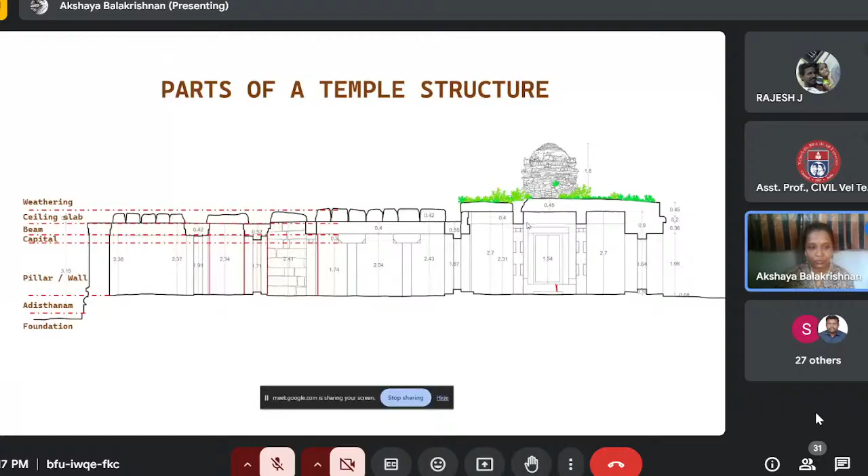So this is a stone structure. When we talk about a brick structure, the same thing repeats, but the wall is made of brick. When we talk about the roof, this is how a roof looks when the weathering is removed. The ceiling slabs are placed over the beams. So how a temple reacts is...

It works on the load transformation basis. When you have the ceiling slab, the weight of the ceiling slab is borne by the beam structure. The weight of the beam and the ceiling slab is borne by the wall or the capital and the pillar, and then the weight again transforms to the plinth portion and then the foundation. So this is how a roof looks when the weathering is removed.

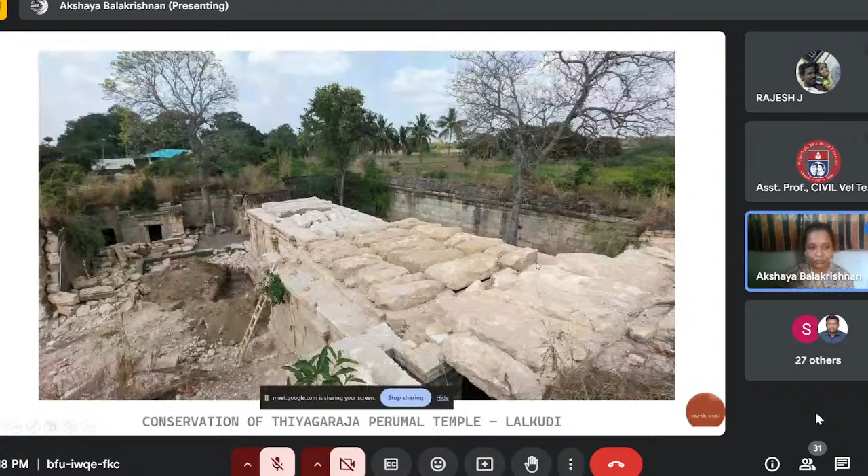And then comes the stone walls. Typically people think the entire wall is made of a single stone, but that is not what it is. What we have is an outer veneer wall, and then a core in between, and then the inner veneer wall. So what we usually see is just the outer and inner veneer stone walls. The inside core wall is not usually visible. The core wall is usually made of debris.

So either the lime and brick bats are used in a core wall, or the stone waste that we get during chiseling or sculpting is mixed with lime mortar, and it is poured in between the two veneer walls.

In conservation, we usually say the stone walls are like the bones of a human body. When a bone gets fractured, it can be easily fixed. Whereas the core wall is called core wall because it holds the entire structure together. When the core wall is deteriorated or affected by vegetation or human error, you'll have to remove and reset the entire temple. But if the core wall is tight, it gives strength. If only the outer and inner veneer stone walls are damaged, you can easily repair or restore a temple structure. So this is the inner veneer wall and the core wall in between.

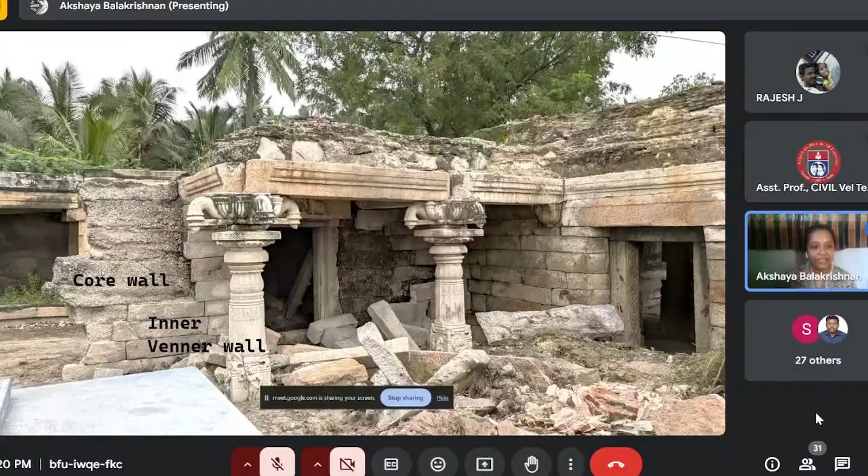You can even see the case example here. Here the core is affected, whereas in this case, if you see, the core is very good, so it can be conserved very easily. Whereas here the core is deteriorated due to moisture and vegetation growth, so here the entire temple has to be removed and reset.

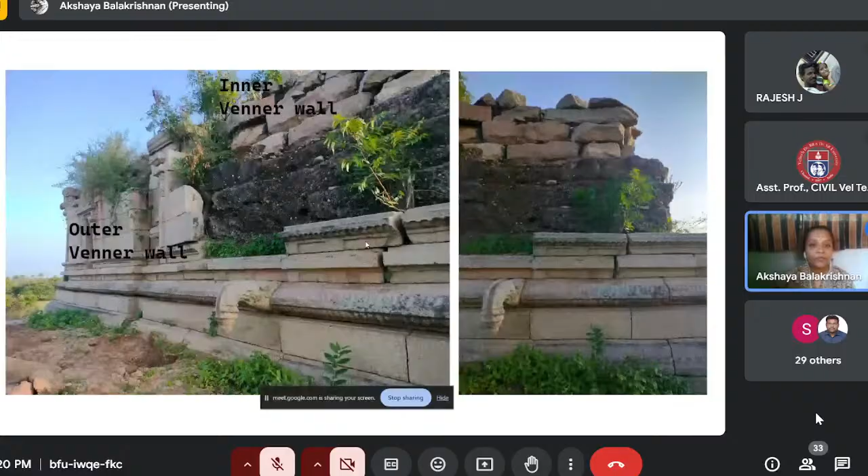So in terms of section, you can see any vegetation that grows only from the core wall, because it has all the moisture and the feed for vegetation to grow.

I would also like to ask, is everyone comfortable in English, or can we talk in Tamil? Whichever language you prefer, we can continue in that. English is fine, or can we talk in Tamil? I think English will be better, ma'am.

Okay, so when any vegetation grows, it grows from the core wall because that is where the feed for vegetation comes from. When the stones are assembled, there is no mortar in between the stone blocks, it just works on the interlocking principle. So what they do is keep two layers of stones, pour in between the core wall, and then keep stacking the stones higher and higher. This is how the walls of a temple look.

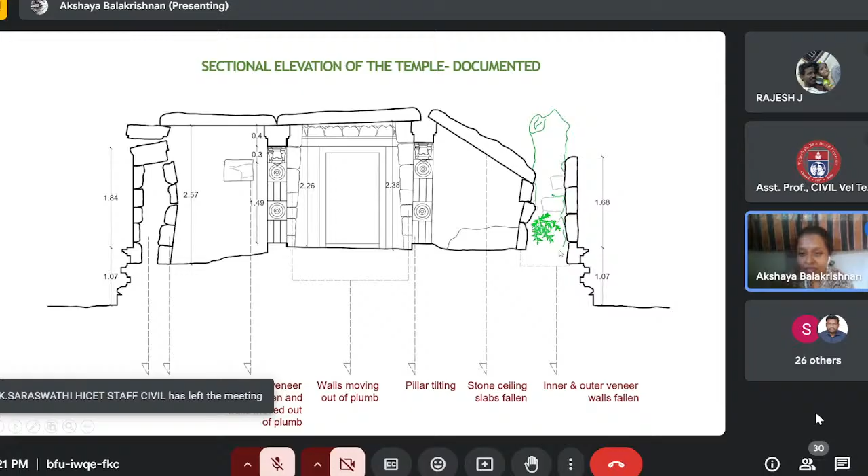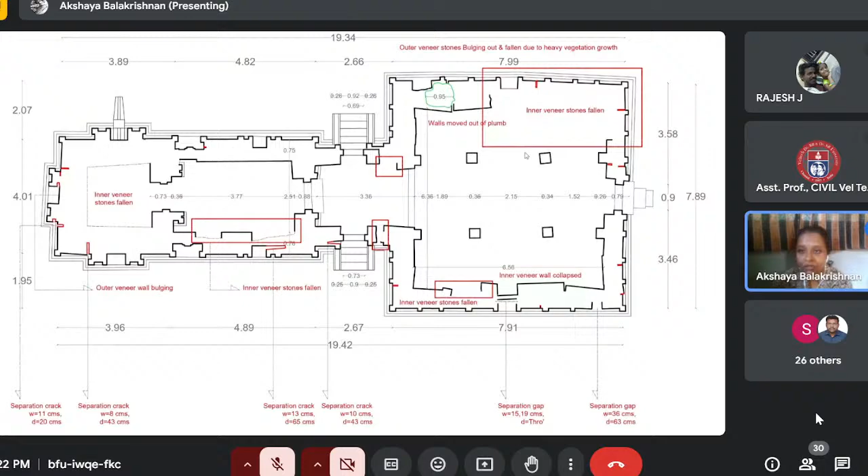So here an entire tree has grown from the core wall, so this has to be entirely removed and reset. Here's another example. From the plan view, you can see two layers of stones, and in between you have the inner core wall made of lime and brick, and from there a tree has grown. It usually pushes the inner or outer veneer stone walls, and it leads to damage of the structure.

Coming to the different types of foundation we can see in temple structures, usually the misconception is that the stone foundation goes 10 feet, 6 feet, 7 feet deep, or some people say temples go 10 feet into the ground level. That is not at all the case. So when we look here, we have different types of foundation.

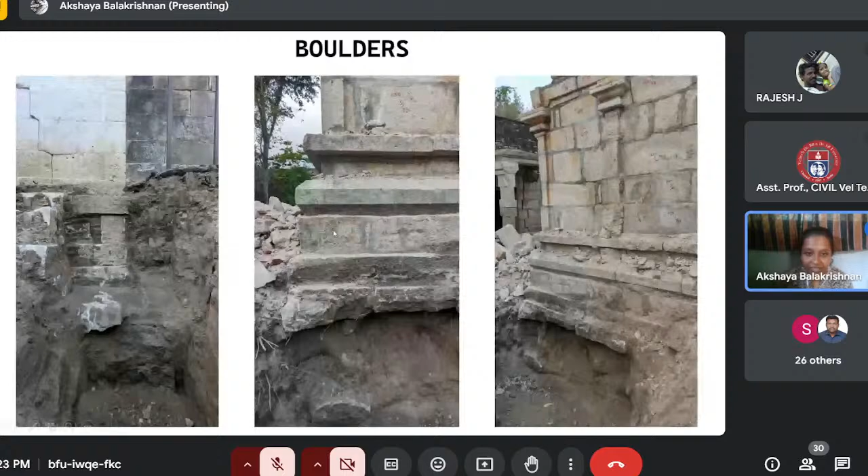One is the boulder system - stacking up all the boulders and then constructing a temple just above that. This type of foundation can be seen in the central part of Tamil Nadu, where there are rocky surfaces. This is a temple near Perambalur, where we observed boulder foundation. These are the boulders, and from there they started the Adisthanam portion, and from there the wall structure continues.

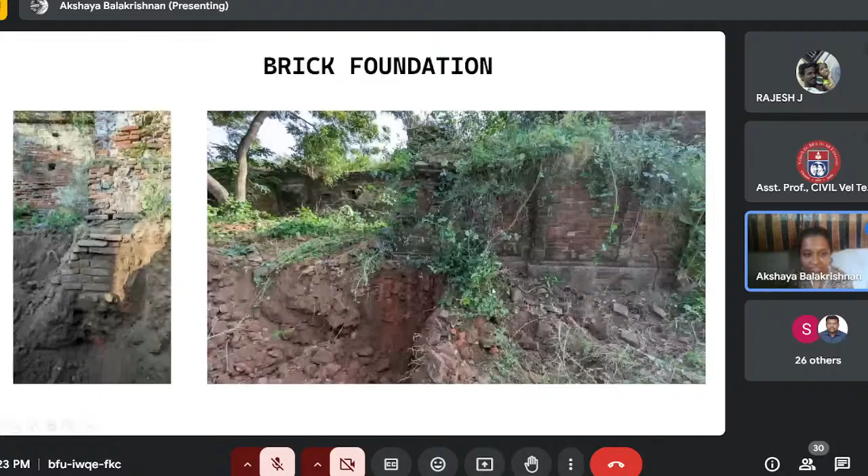Next is brick foundation - just brick structure, where the depth of the foundation goes from 3 feet to even 5 feet. It has only brick, and from there the brick masonry continues. This is the majority of foundation seen in any part of Tamil Nadu - just one layer of stone platform, around 23 to 25 centimeters. This is the very predominant and common type of foundation seen almost everywhere.

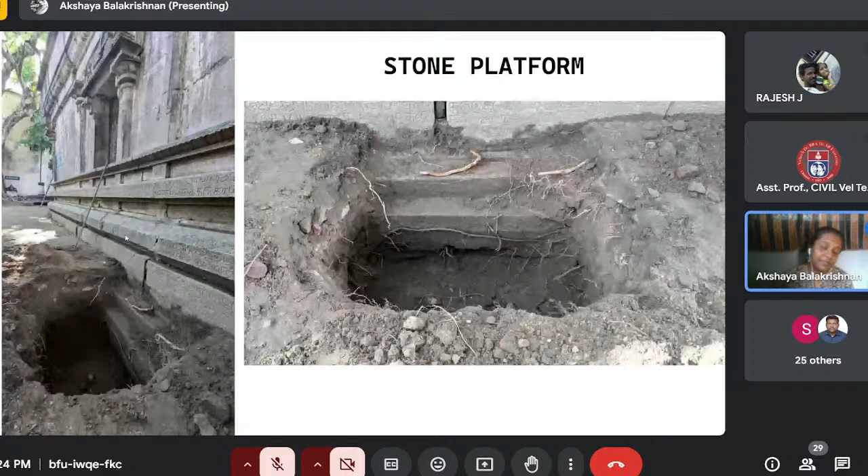Beneath this single layer of stone platform, there is sand that is highly rammed or compressed, and above that just one layer of stone platform, and from there the adisthana or plinth level starts. This is another stone platform foundation, just 10 centimeters depth. From here we can see the river sand compressed, and from there the temple structure continues.

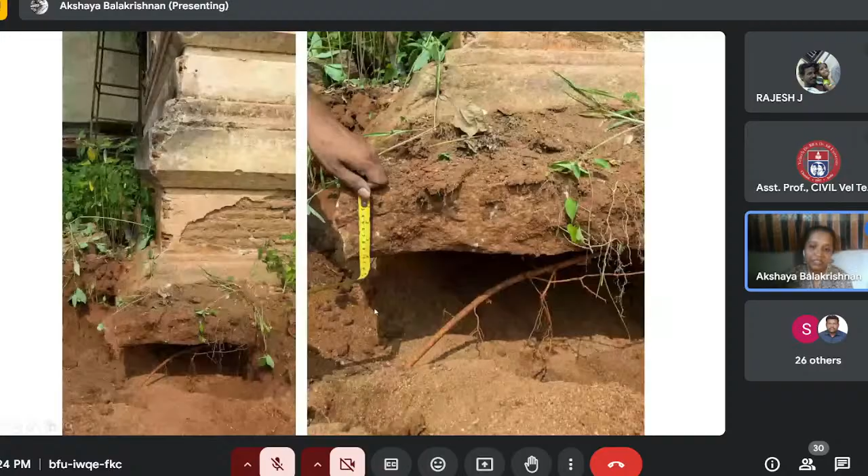This is another type of foundation called mixed foundation. Here we have three layers of a stone platform, which will be around 60 to 65 centimeters, and from there brick masonry continues beneath. This type of foundation is usually seen in delta regions or any regions adjacent to a river body, like where a river flows beneath, or it will be agricultural land. In such places we have this type of mixed foundation.

So these are the different types of foundations that are easily seen in any temple. It is not that the deeper the foundation goes, the stronger the temple structure is. No, the thing is how the soil is and how the load gets distributed, because we don't have point to point load distribution. The load gets distributed everywhere, and how well the soil is rammed, these things matter in terms of temple construction. Does anyone have any doubt up to this point, or can we continue?

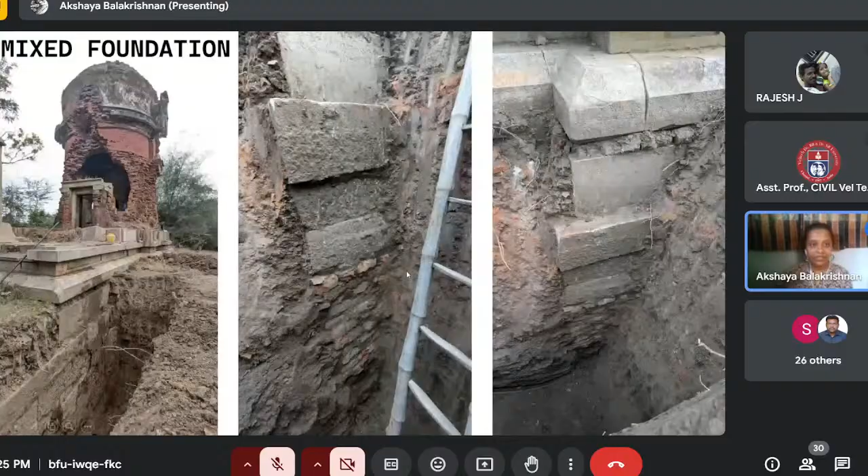We can continue, ma'am. Yeah, okay, ma'am.

So we have seen the major parts of the temple and how they are made, and now coming to the different damages in a temple structure. When it comes to damages, they can be majorly classified into two types. One is vegetation, which is the main cause that leads to damages of any temple structure, and the next is stone deterioration or human error - people destructing the temples. They would have added different materials over the temple, leading to improper load distribution, which again leads to structural imbalance. So those are the different categories, but the major type is vegetation growth.

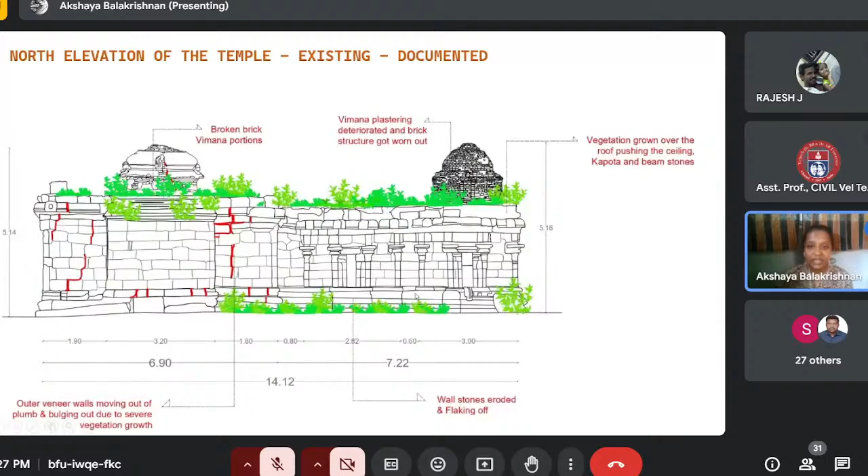So this is how we document a temple structure and assess its condition - what are the different damages observed and how to treat them. Here, the major reason for the deterioration of this structure is due to vegetation. What can be done is you remove both the inner and outer veneer walls, repair the core or redo the core freshly, and then refit them.

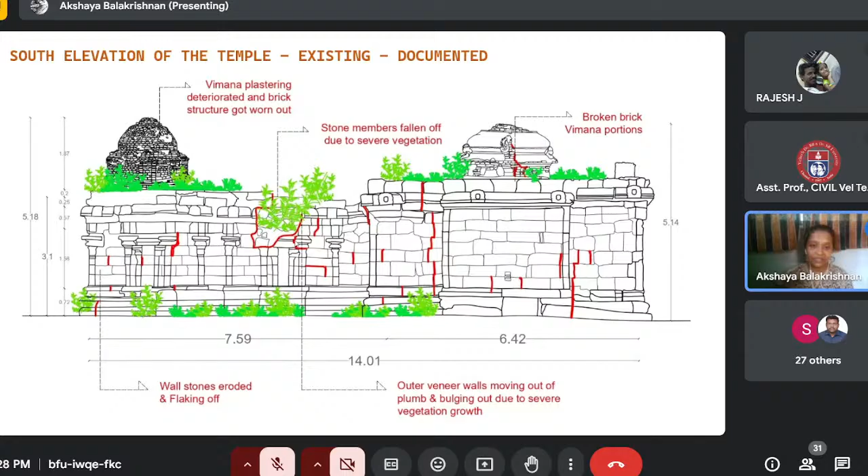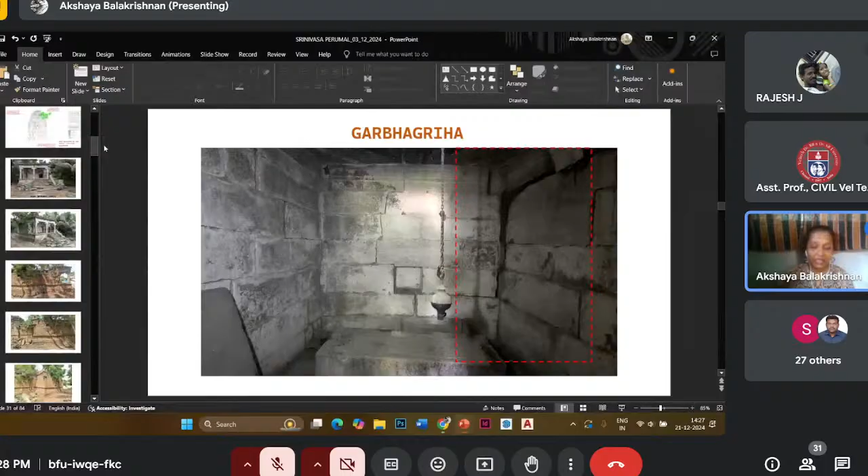Coming to another temple structure, the example I'll show you here is another case of vegetation. The previous one I showed had minimal impact due to vegetation, whereas here it has a massive impact due to vegetation. For example, you can see one part of the mandapa has already fallen here.

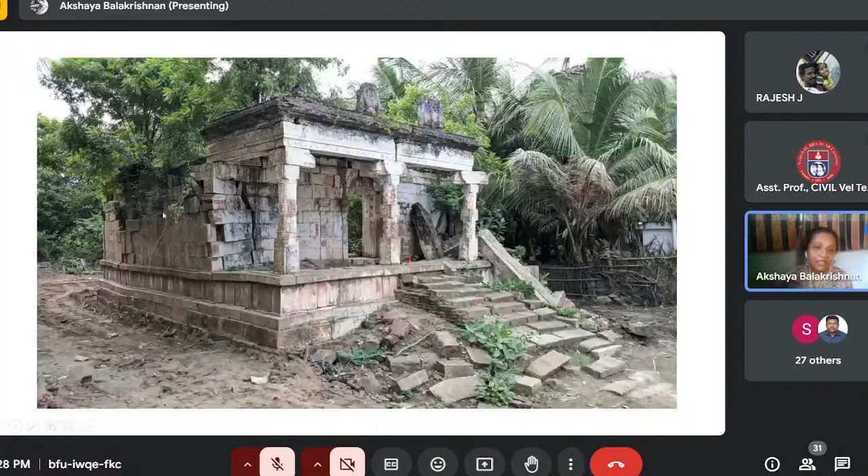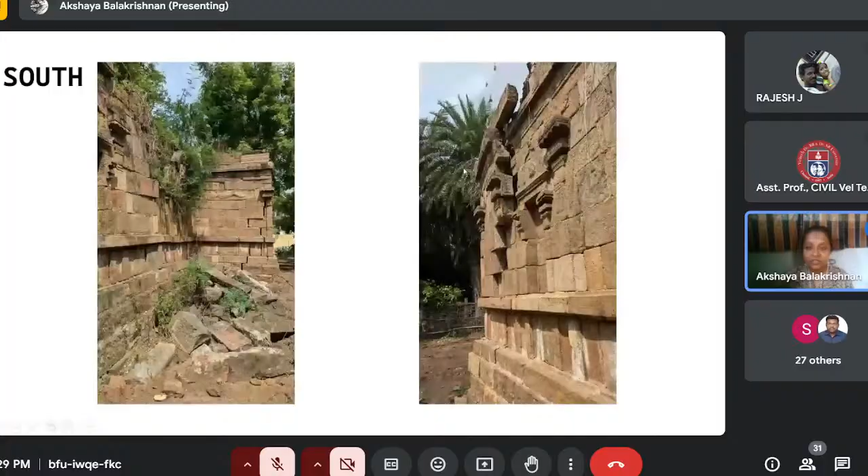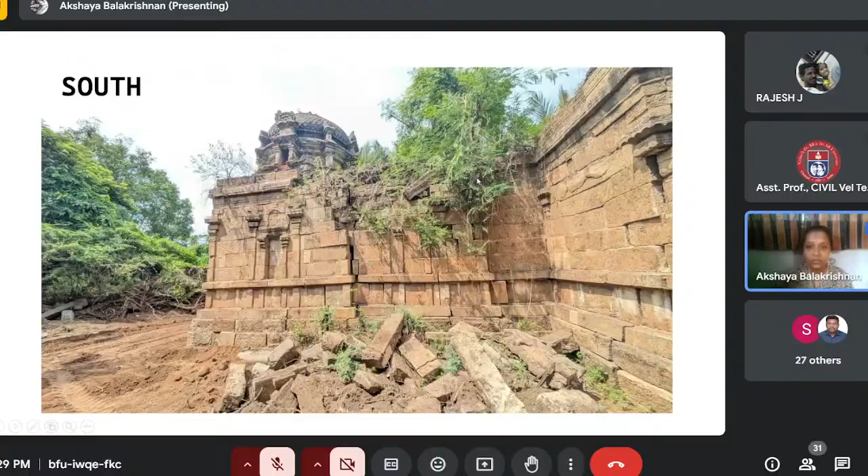This is how the stone structures go out of plumb - we call them out of plumb. The stone veneer walls move because a massive tree has grown in between here. This leads the stone walls to come out, get tilted, or even fall off. You can see the stone members that have fallen off due to the vegetation growth, and you can see here how it has gone out of plumb.

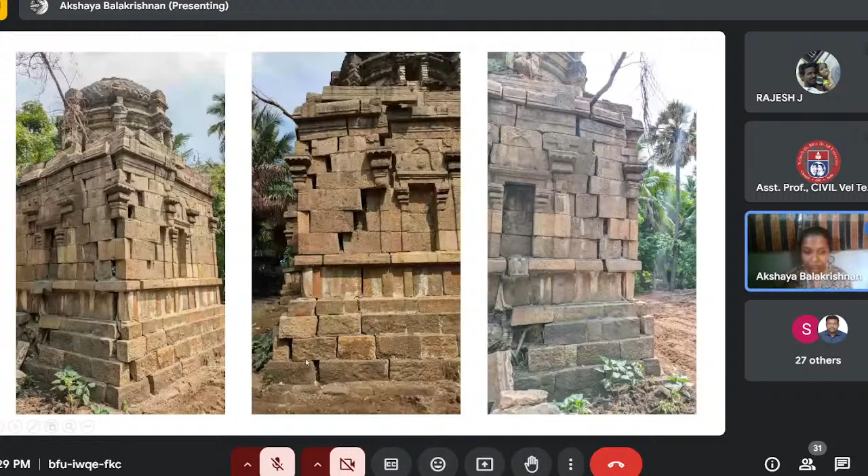So how can you repair this? We cannot repair such structures. What can be done is you have to remove and refit - reconstruction is the only possibility here. We cannot preserve or even conserve the structure because the tree root has gone up to the foundation level. You can see here the tree has gone up to the foundation level.

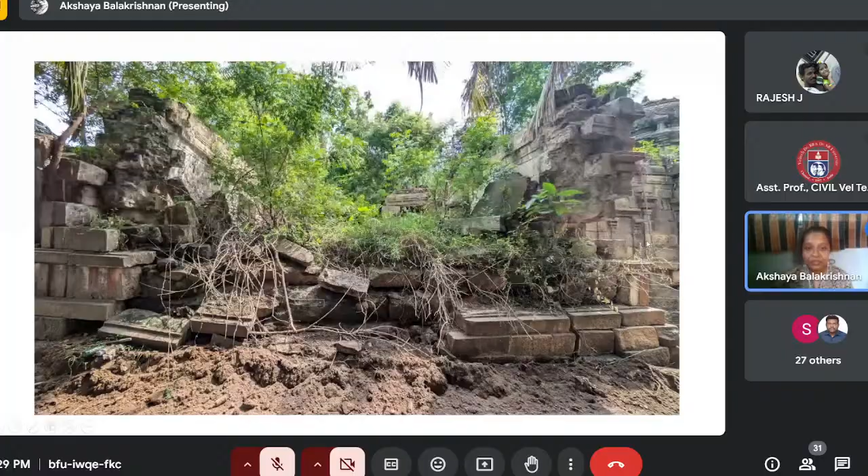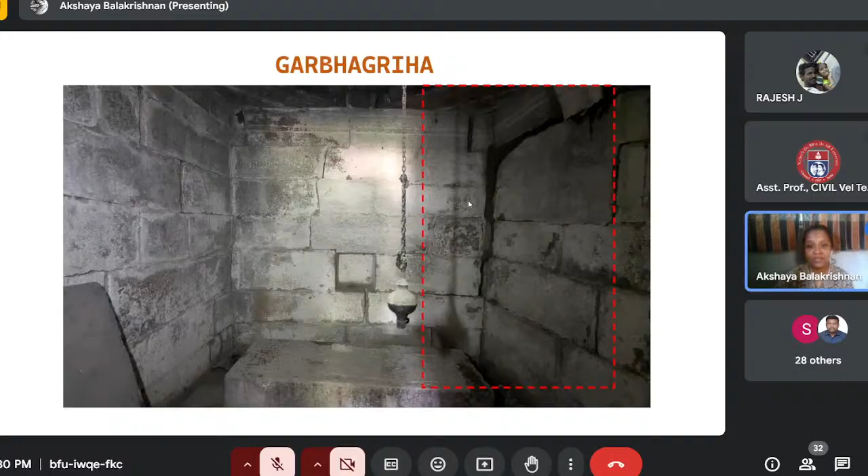So one entire part of the mandapa has collapsed. Usually when a temple structure gets affected, either the inner veneer walls get affected or the outer veneer walls get affected. In such cases, we can only remove the affected portion. If the outer veneer wall is affected due to vegetation, you can easily remove, redo the core and fit the outer veneer stone portions. Whereas in this case, both the inner and outer veneer walls have been affected - you can see how the foundation has collapsed, how the stone floorings have lifted up due to tree growth inside. You can see the tree grown inside the garbhagriha, or the karuvarai as we call it.

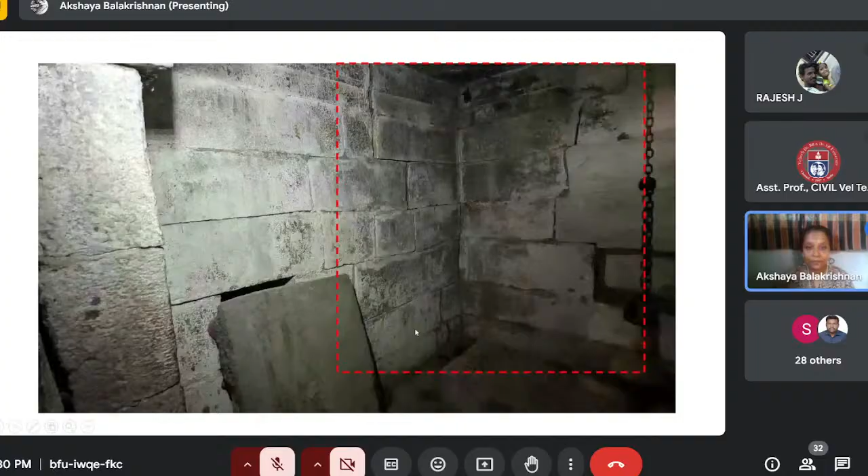So how the stone floorings have undulated, and how the inner veneer walls have also been affected majorly due to vegetation growth.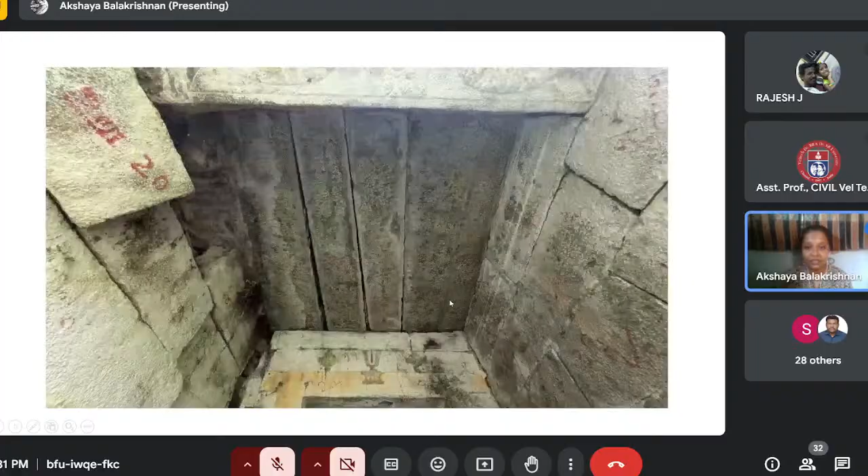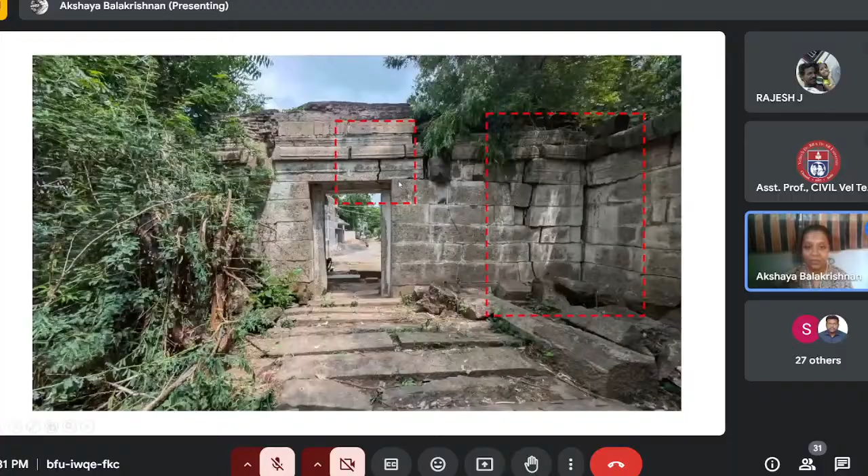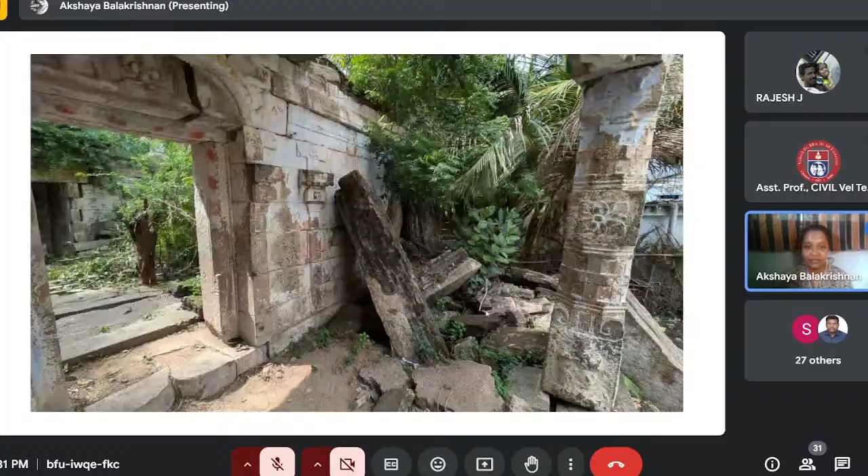So this is the portion that we saw from the outer side, how the mandapa walls have collapsed, how the beam members have been broken, and how the wall structures have gone out of plumb. The entire mandapa, including the pillars, beams, and capitals, all have fallen off due to severe vegetation growth. So this is one major cause that will lead to the deterioration of a structure.

So the next case is stone deterioration. For example, you can see here how the stones have eroded over a period of time. This will easily be a 500 year old temple structure, not more than that. But look at the amount of deterioration. So we won't be able to even reuse these stones when we conserve the temple.

The only thing we can do is, if you can see, the brick vimana over the stone structure is in a very good condition, but the stones that are holding the vimana are not in a good condition. The stones have eroded. So what we are approaching in this case is we are planning to cut the vimana, lift it, redo the stone structure, and refit the vimana. This is the first time we are trying to experiment with this because the brick structure is in a very good condition and we don't want to remove everything completely. Once we are able to do this, we can take this prototype to different temple structures where the brick structure is good but the stone is not in good condition. We'll be able to incorporate this idea wherever we can.

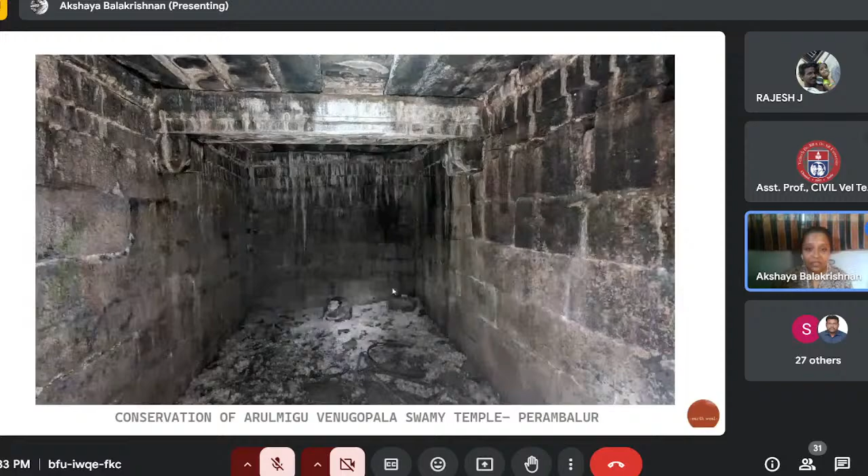So here you can see an example of soot deposit, or how bats or other living beings cause damage due to unusage of the temple structure. What are all the damages that can be caused? This is surely caused due to moisture and bats.

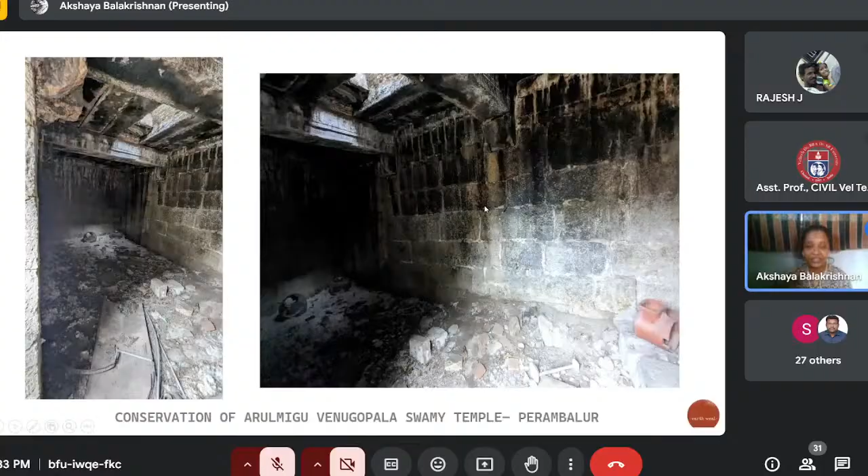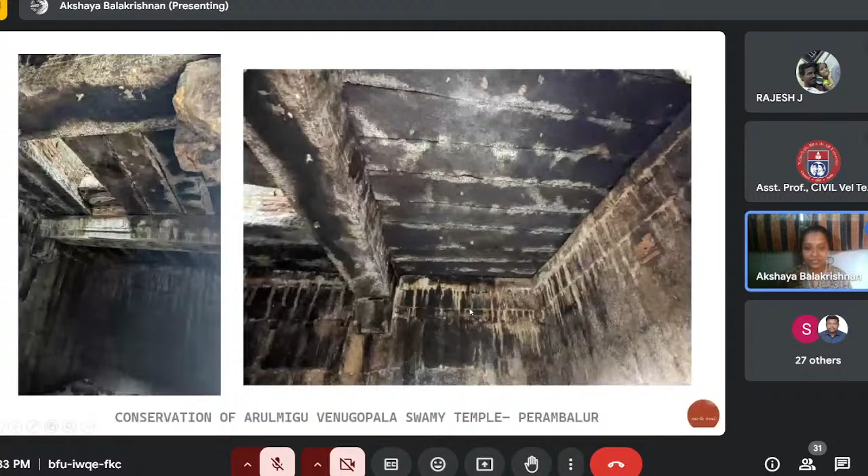But when you see the vimana, it is in a very good condition. This type of stone is made of fossils, so you can see different types of shells coming from the stones, right here. These are sedimentary rocks or fossils that are being used for temple construction, and they erode over a period of time.

So this is another case study that I wanted to show you for stone deterioration. So how can we conserve all these temple structures?

Methods of conservation: the first step is documentation and condition assessment. So how do we document a temple structure?

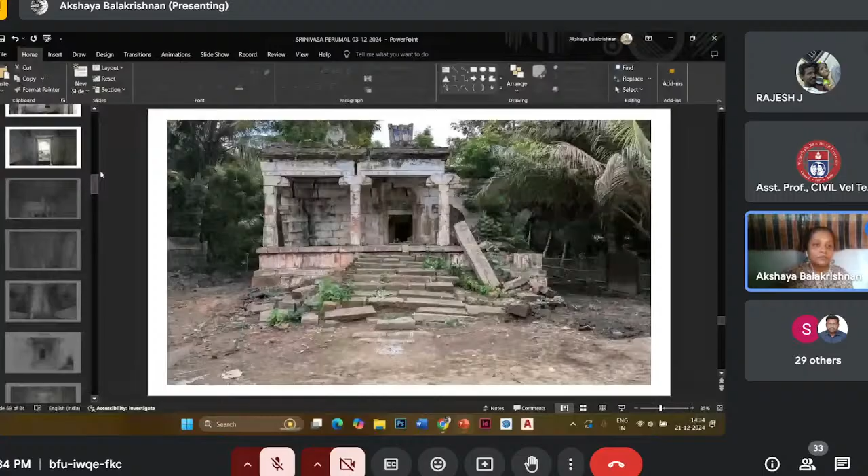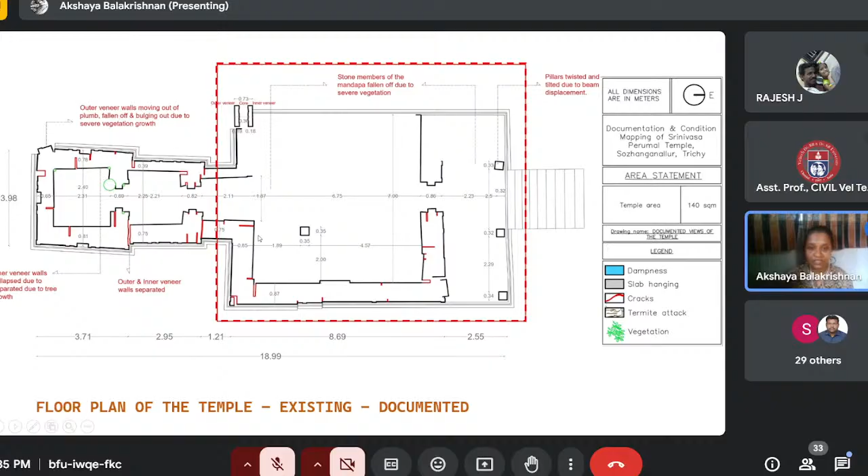First, we prepare a plan layout where we'll show how many stones are dilapidated. This will be a detailed level of document, a preliminary level of documentation where we assess the conditions - what are all the major damages that have occurred and why, and how to treat them. This includes the cracks formed due to vegetation growth, the separations that have occurred, and the fallen portions. We'll be recording everything.

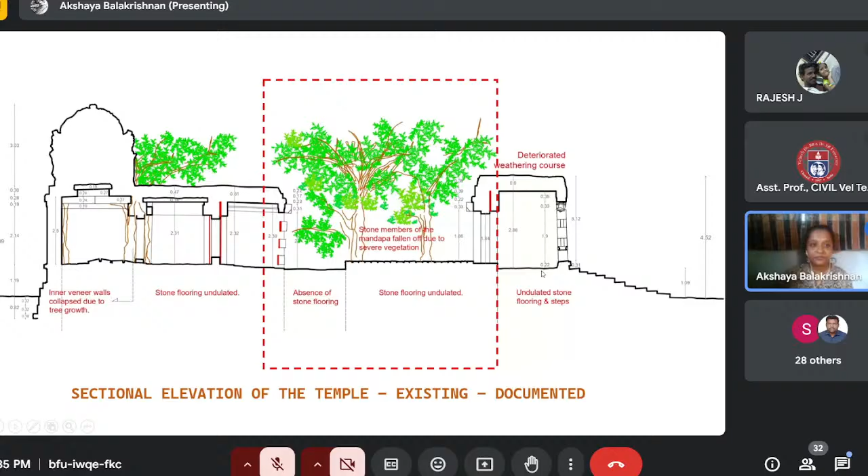So this is done at a plan level, and then at a sectional level, showing how the stone floorings have undulated. We can also record any tilting observed in the walls, which will need to be adjusted. Any damages observed in the temple structure will be shown in the sectional drawings. These are the elevation drawings we have prepared that show different damages, the conditions, and the level of damage that has occurred.

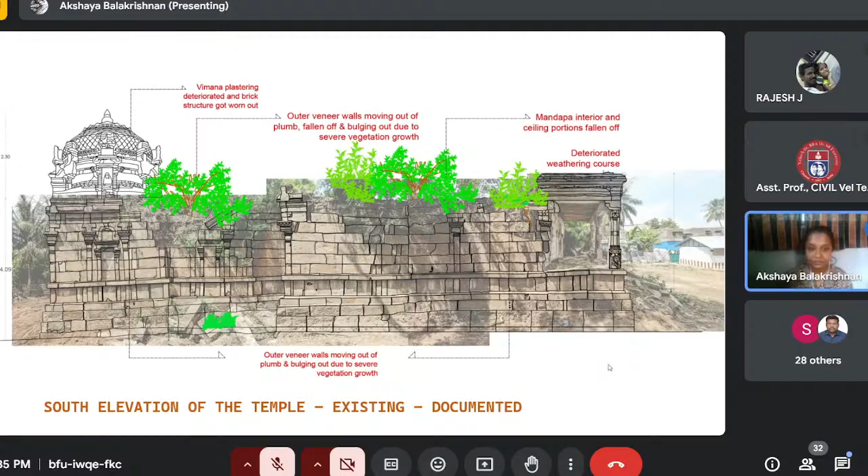So this is the first set of restoration, that is preparation of documentation drawing and assessing its condition. And when it comes to brick structure, once we assess, so till now I was talking about conservation or restoration of stone structures.

When it comes to brick structure, how can you conserve them? Stone structures are like bones, whereas brick structures are like our tissues. So once they are gone, you have to replace them. That is the similar case here.

So in a brick structure, when a tree grows, it gets lots of space and moisture from the brick and the lime water to grow. So they grow vigorously, and wherever they get a chance, they grow everywhere, and they separate the brick structure and lead them to fall.

So you can see the structure. It may look like a sound structure, it is intact, but when you just hit the brick structure, they fall off rapidly. That is the case when it comes to bricks.

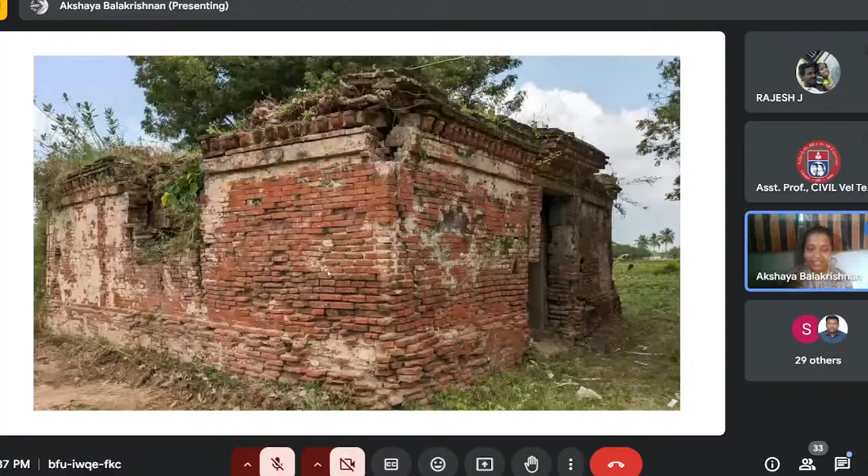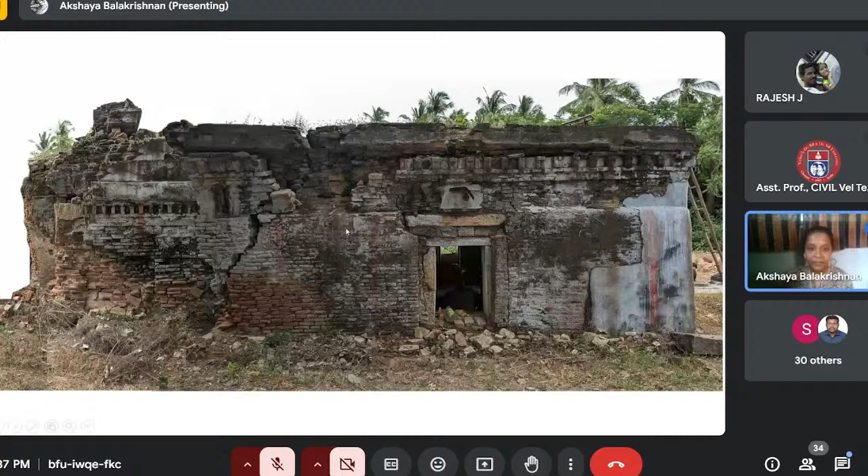This again is an example of how the bricks have separated from one another and how they are about to fall, on the verge of falling. Whereas this is a case where the core structure is sound, only the outer brick surfaces have fallen off.

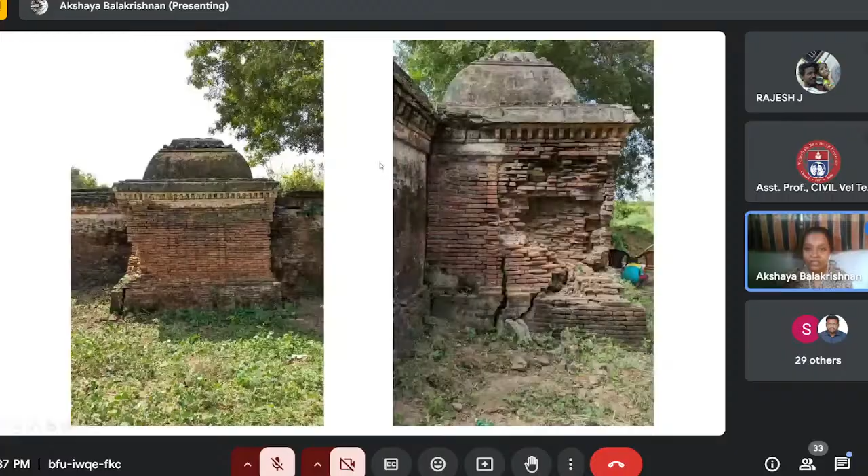How can you treat such structures? If the case is like this, you have to remove and reset. Whereas if only the erosion has happened or only the edges have fallen off, or there is a crack in between the structure, something like this,

what you can do is go for stitching or underpinning. Stitching is when you have a through crack in between like this, you'll have to take off portions from different intervals and introduce a different material. For example, you can introduce stone.

We don't usually go for cement or concrete blocks. We usually go for either a lime block or inserting a stone, because that is the appropriate material you can use for heritage structure conservation.

So you can see a continuous crack here. You'll have to remove different patches from different levels, and you can introduce a different material like a stone or a lime structure in between to stop the crack.

One thing you have to observe is whether the crack is still continuing or the crack is dead. What you can do is place a panel of glass in between the crack, and you can see if the glass panel has moved a few centimeters apart, or if the glass panel is also cracking. These are different methods to find whether the crack is live or it has stopped.

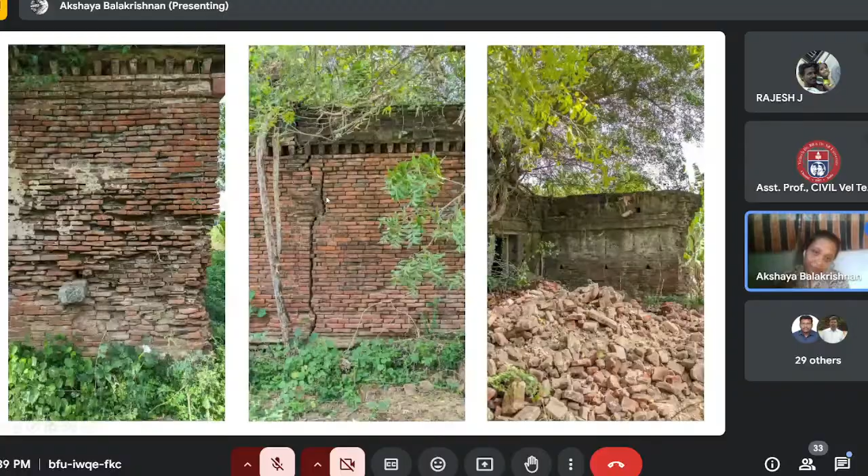Iron will lead to corrosion in a future period of time, but you can use stainless steel for stitching, or you can incorporate different methods such as introducing stone members or lime members in between the cracks.

So these are the types when it comes to brick wall conservation. And then you can grout the joints using lime plaster. We are very strict - we never go for cement plasters or concrete mortars. We don't go for that. We either go for lime mortar, lime plaster, or go for stone stitching.

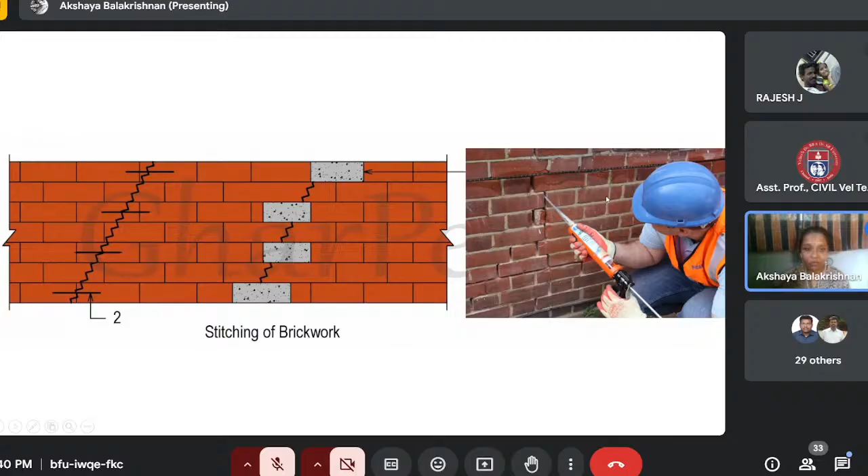So when it comes to stone structures, the first type is restoration - how the walls are restored. So this is one example.

What we have done is we removed the outer veneer wall. As I have mentioned before, the inner veneer wall is not affected due to vegetation, only the outer veneer wall is affected. So we removed the outer veneer walls, and we removed the tree trunk.

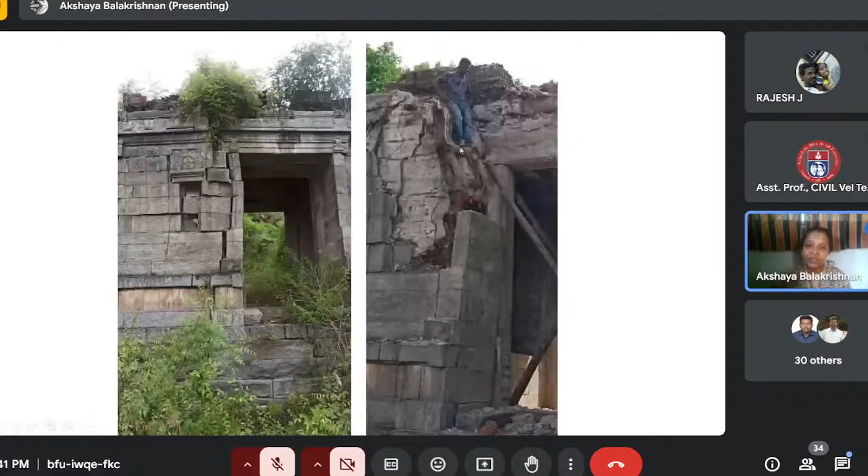Yeah, this is the tree, and we are refitting. What we are doing is strengthening the lime core by adding some boulders or doing lime plastering work, and refitting the stone members.

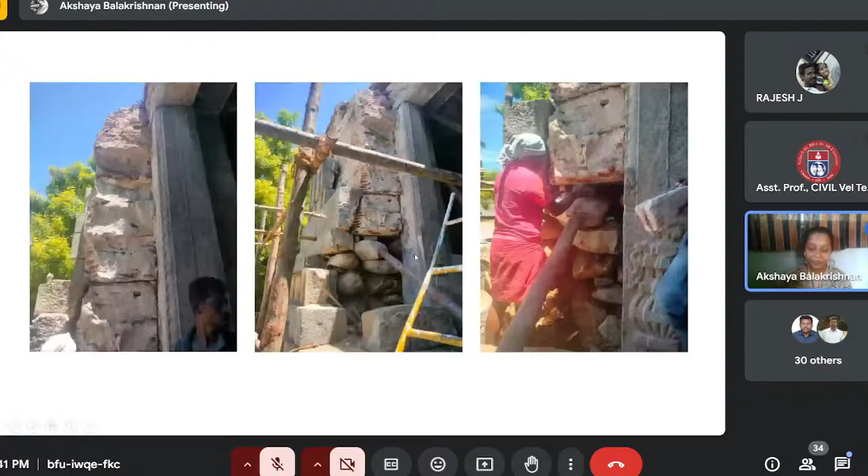So this is how the temple looks when the vegetation is removed, and then we'll have to refit all the removed stone members. So this is a part of restoration. Next is conservation - you can see how we have conserved a temple here, the before and after images.

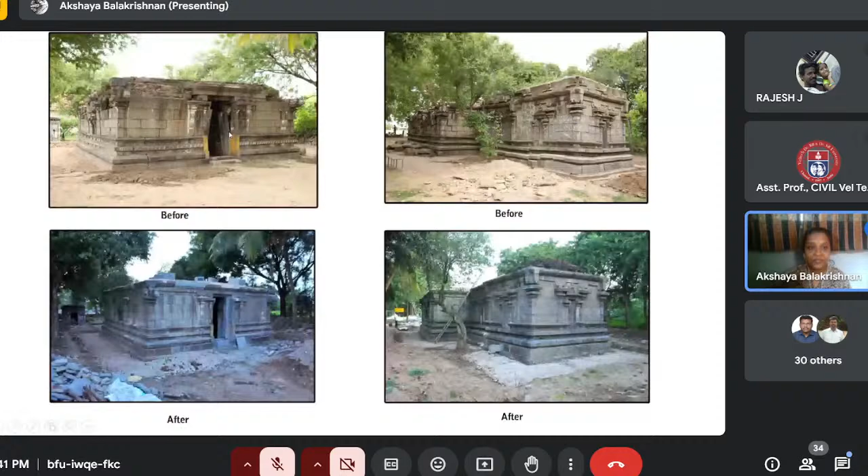Here again, the major cause is vegetation growth. Luckily the inner veneer walls are not damaged in this case, only the outer veneer stone walls are damaged. So we have removed the outer veneer wall, redone the core, and then refitted the stone walls.

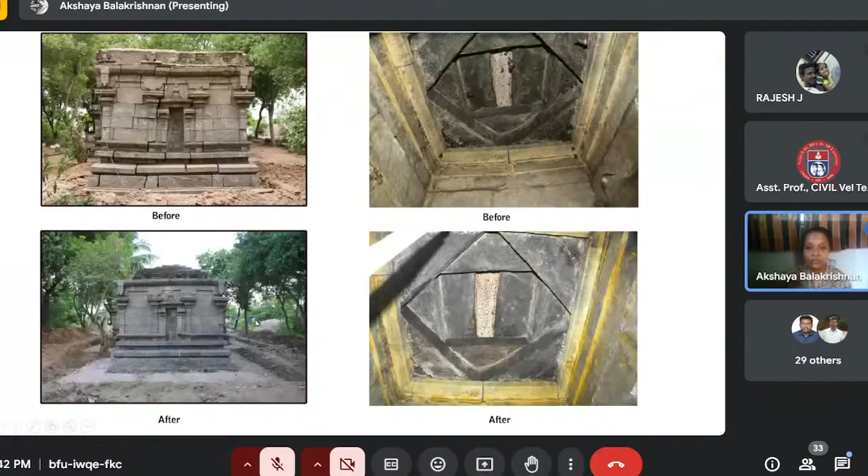You can see how the removing and refitting happens here.

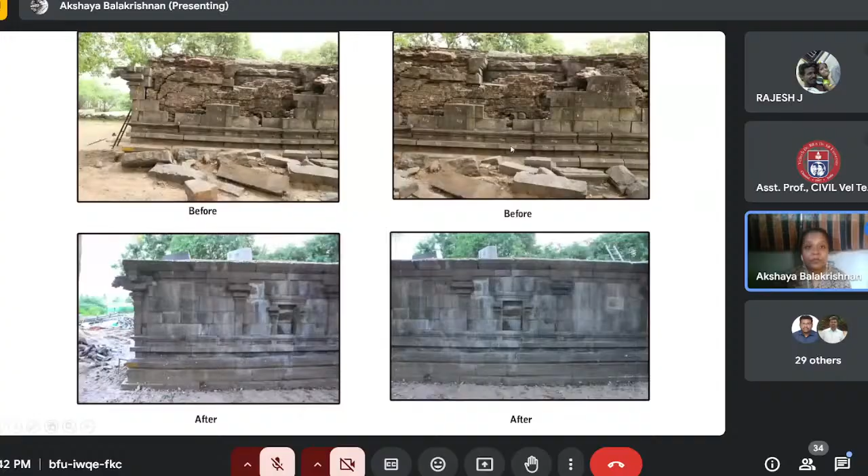Once we remove the stones, some members may have broken, or some may not be in a condition to be reused. For example, you can see this portion here, and only for those portions we'll order new stones, done with similar measurements and proportions, and then refit them.

You can see here, only that portion will look in a different color or visually different, but that is okay. We are not using entirely new stones, we are reusing the stones as much as possible, and only where the stones are not available do we go for new stones.

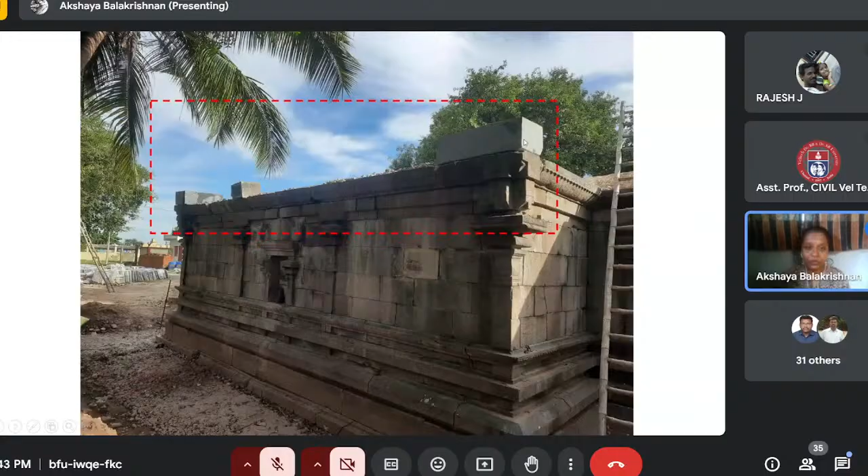For the counterweight, since the original counterweight stones were not available, we have introduced new counterweight stones. The purpose of the counterweight, as the name suggests, is to add to the weight of the entire structure. The entire temple construction concept works on load distribution, so however much weight you give over the structure, it stands still. So here we are imparting new counterweight stones to the structure, and then applying a new weathering course.

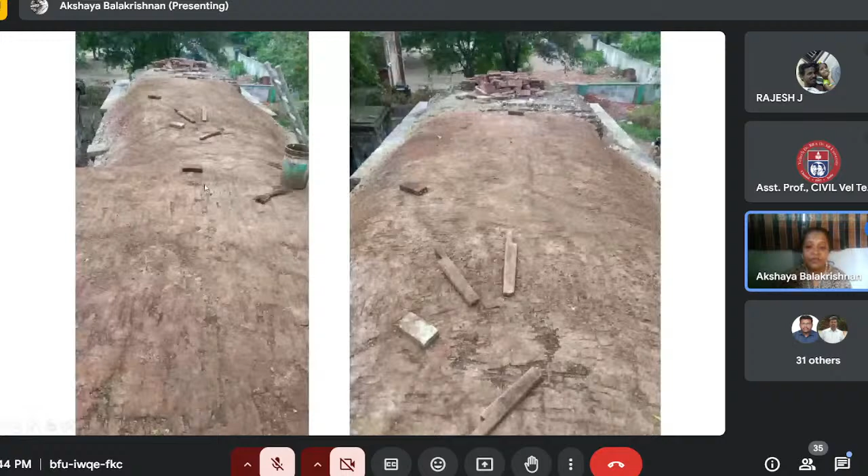Here you can see how much slope we have given. The more slope you give, the less water will stack on the terrace. If water stacks on the terrace, it leads to water seepage, damage, and dampness in the interior of the structure. So we have to give a good slope — around 1 to 1.2 feet in this case — and we do the weathering using lime concrete, over which we lay brick bats.

This is the tool that we use for ramming the brick lime concrete. Once you ram it well and the lime concrete is set, we go for brick bat for the weathering finishing.

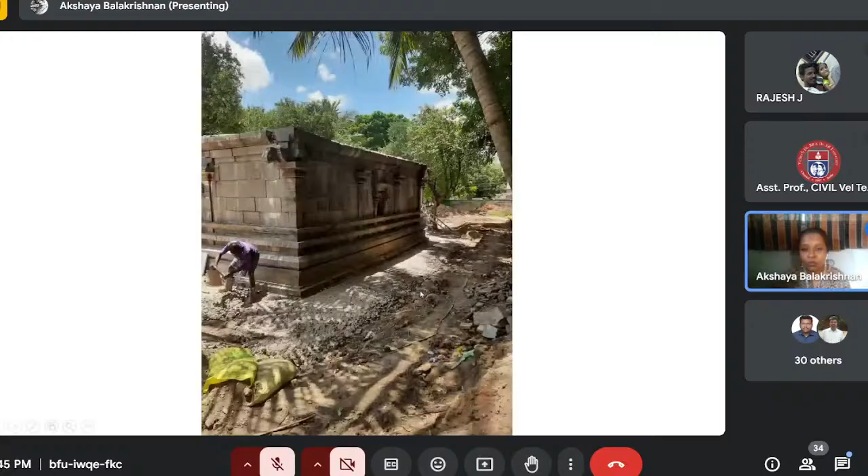The next important part is providing a stone apron. Initially they wouldn't have given any stone apron, but providing one stops water percolating into the foundation of the structure, and it also stops vegetation growth adjacent to the structure. So we take around 1 to 1.5 meters from the temple structure.

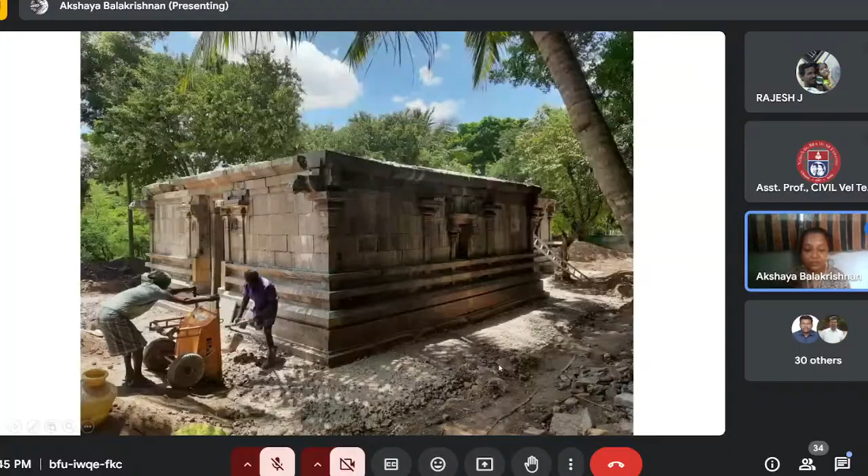We do a pitting, and then pour brick jelly concrete and ram it well. Here you can see how they are pouring the lime concrete with brick jelly, and then we place the stone flooring. This is called the stone apron — it saves the structure from water percolation and vegetation growth.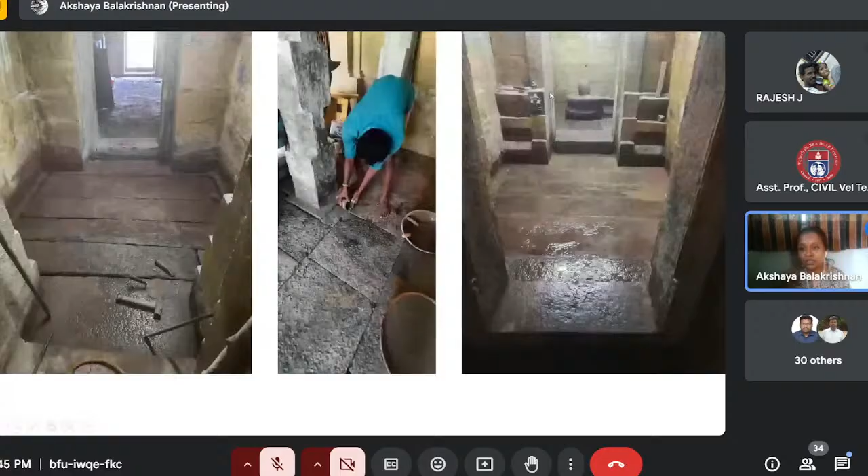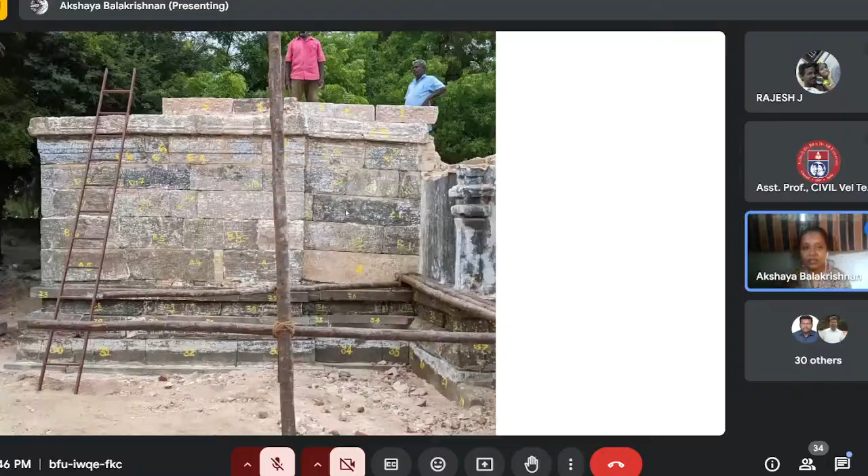So this is an example of conservation of a temple. Now we can come to the reconstruction of a temple structure, where we have removed the old weathering course. This is the first part — removing the old weathering and numbering the stone members. We number them in one order, say starting from east, continuing east, north, west, south, so it continues in one order.

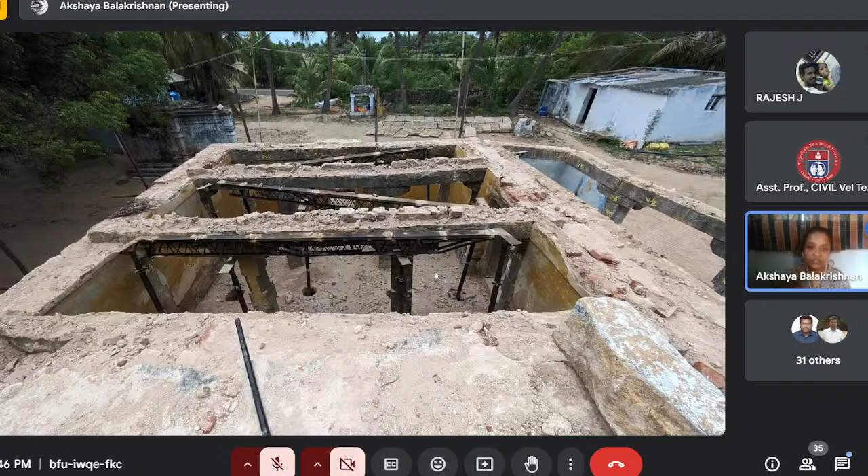This is inner veneer wall stone numbering, and this is outer veneer wall stone numbering. Then we provide supports for removing the stone ceiling slabs, and we provide supports for the beam, capital, and the pillars.

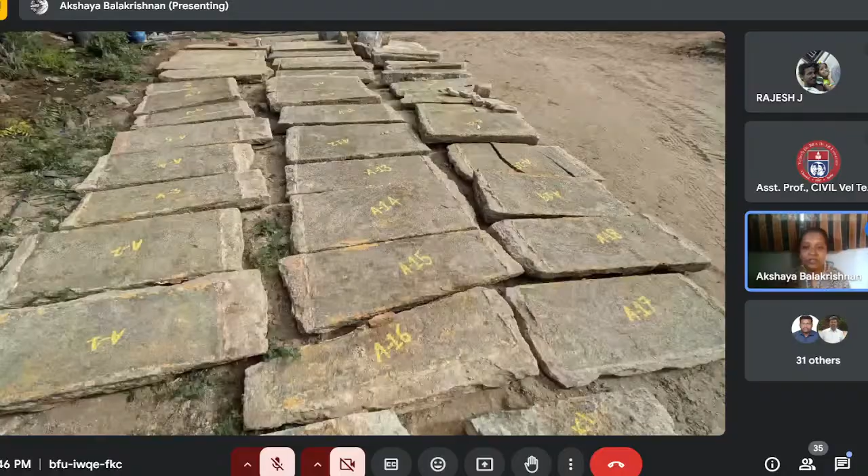We remove the stone members one by one. This is how the stones are removed. Workers remove each and every stone, and then the stones are carried away by the crane. You can see here, and then we'll be stacking the stone members as per the numbers we have already made. As I told you, this stone slab has already broken.

Once we remove, we won't know how many stone members we'll be reusing as such. So for that, we can count approximately 15 to 20 percent we'll be using new stone members, but the remaining 80 percent we can reuse the old stones.

Once we remove, we are giving a new foundation here. For this also we are using lime concrete foundation. So we have concretized the entire portion using lime, and we'll have to allow it to set for like 2 months because the lime takes a lot of time to set.

So for 2 months we leave it just like that, doing the curing. Once the foundation is set, we again use boulders that you can see here. We go for boulder foundation up to the flooring level, and then we again start with the adisthanam and the wall, pillar, beam, coming to the ceiling slab and the weathering course.

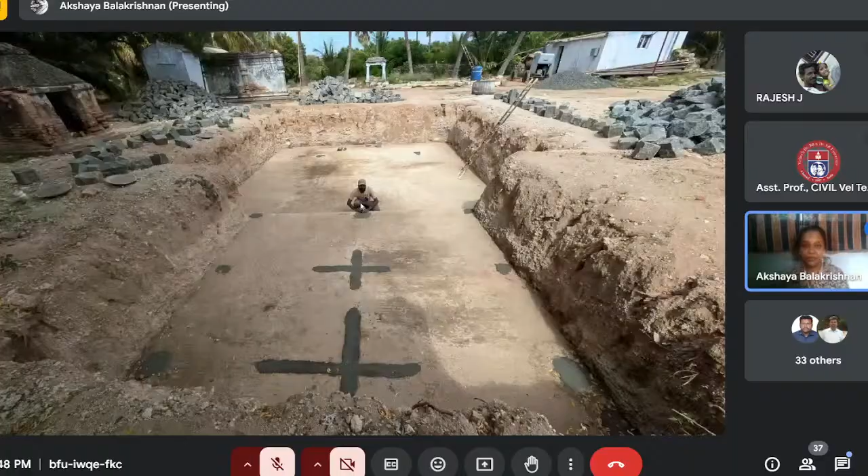This is how, once the lime concrete is set, we mark as per our drawings, which have already taken the same measurements. We mark the drawings and set the different measurements, and start with the foundation, and so on up to the weathering course.

So that is it - how we conserve, restore, or reconstruct a temple structure, and how we treat different foundations. This is all what we do. When it comes to foundation, what we do is, majorly when it comes to a temple structure, the foundations are not at all disturbed.

For example, I showed you one temple. Out of all the temple structures, we have hardly seen like 5 temples where the foundation has been affected. Only for such structures we go for redoing the foundation or strengthening the foundation.

Majorly, since we have just one stone panel present for the foundation, the foundation majorly works on how the river sand is used, how well the soil is compressed, and how well the load is distributed. That is how a temple structure works. So hardly do we find any foundation damages.

Only for very few temples do we go like this; else we never touch the foundation. We leave the foundation as it is. We work only on the superstructure of the temple, on how we conserve it. So this is how we approach conserving a temple structure.